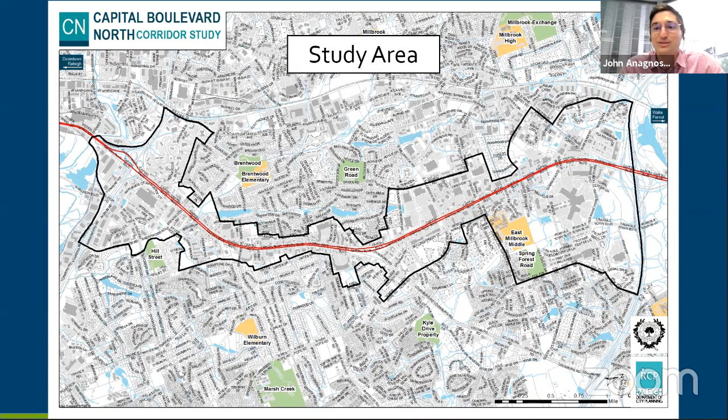This corridor study deals with a portion of Capital Boulevard between I-440 and I-540, and is mostly focused on the commercial areas along Capital Boulevard. Now, the proposals we have today do involve some of the neighborhoods, because we also know that neighborhoods like to have good bicycle and pedestrian connections as well.

The previous phases of this study talked about how to improve Capital Boulevard itself for all modes of transportation: vehicles, bus, bicycle, and walking. And then we also have some land use policies, and we are now towards the end of the study where we're talking about bicycle and pedestrian improvements and policies for community and economic development.

This study is initiated by the City of Raleigh and led by the City of Raleigh, and began in 2018. Now we're again moving towards the end of the study, and after this phase, we'll be preparing the final study report to be presented to the Raleigh City Council at the beginning of 2021, so probably January of 2021, for them to review and adopt.

So let's start out with a little bit of background about the previous phases of the corridor study. If you didn't participate in those phases, or it's just been a while since we've had any public outreach for this, this will help jog everyone's memory.

So the first phase of the study, we looked at how to improve Capital Boulevard itself, and looking a lot at traffic congestion and the growth in traffic that we are expecting in the future.

And so the way that we'd like to approach that issue is by converting Capital Boulevard to what's called a multi-way boulevard. What that means is there's different types of lanes in the street for different travel patterns.

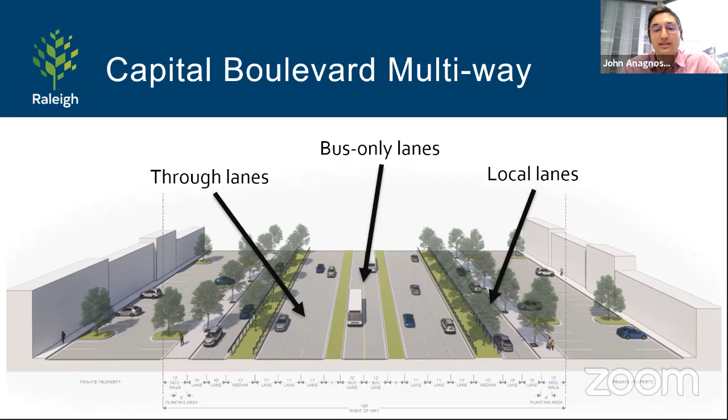The way those inner lanes are able to avoid traffic signals is that we would need to convert almost all of the intersections along this part of Capital Boulevard to interchanges. That means a cross street like Millbrook or Buffalo Road would pass over or under Capital Boulevard, allowing those inner lanes to avoid that cross street.

And then the outer local lanes would meet with the local street and would be able to use a traffic signal to make turns and access all the local destinations that they would like to access.

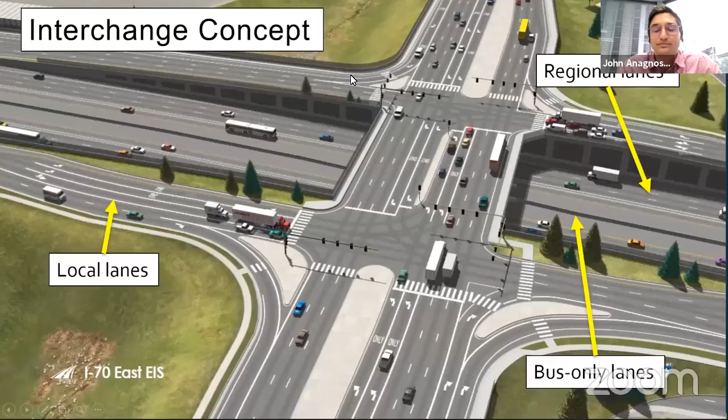So after we developed the idea for the multi-way boulevard and the interchanges for Capital Boulevard, we looked at some of the areas along the corridor where development in the future could be denser, or there could be opportunities for redevelopment. Those three areas are Triangle Town Center at the north end, Mini City in the center part of the corridor - the Mini City Shopping Center and the Capital Crossing Shopping Center between Millbrook Road and Calvary Drive - and then at the south end, the area where Highwoods Boulevard and Westinghouse Boulevard meet Capital Boulevard.

Those three areas have specific recommendations in this corridor study for how tall buildings should be and what types of development would be appropriate in those areas.

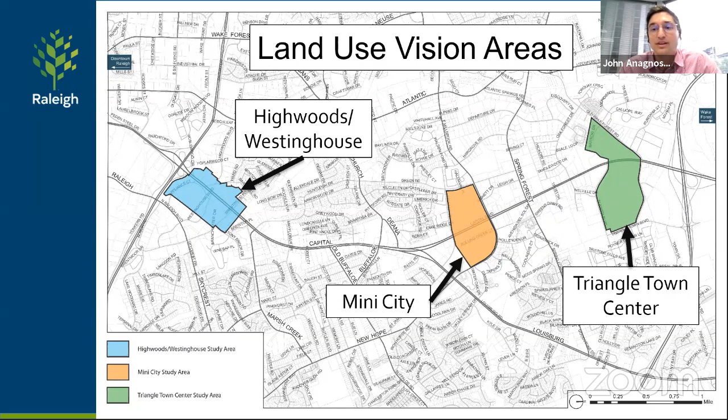So we've completed those phases, and we've gotten a lot of good community feedback about those ideas. Now we're ready for the next part, which is how do we make sure that aside from Capital Boulevard itself, there are good ways for people to travel around by bicycle and by walking, and how do we make sure that the vibrant economic environment we have on Capital Boulevard is sustainable and continues to provide services and goods to the community.

But before we get into the bicycle and pedestrian improvement ideas, we do need to think about what we mean when we say bicycle and pedestrian improvements or facilities. What are we talking about? In Raleigh, we have a set of tools that we use for helping cyclists and walkers have a safe and comfortable way of getting around.

Of course, sidewalks - all of our public streets are required to have sidewalks on both sides - and then intersections have painted crosswalks. In some cases, we can recommend pedestrian bridges to allow walkers and cyclists to cross large thoroughfares or highways when that is a better solution than crossing the street at the same level as vehicle traffic.

And then bicycle lanes, which can be buffered by painted stripes or raised concrete buffers, or bicycle lanes that aren't buffered and are directly adjacent to the vehicle lane. And just to note, in the future the city of Raleigh is moving towards a protected bicycle lane as the primary way that we install bicycle lanes.

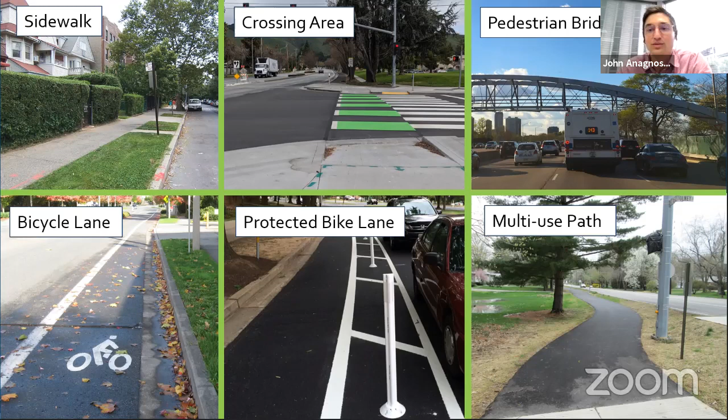And then finally, multi-use paths. A multi-use path is a wider asphalt path that goes along the roadway and can be used by cyclists or walkers, and is also sometimes called a shared use path or a side path, and can also join with a greenway trail - greenway trails also usually have a similar design.

So when we're thinking about what bicycle and pedestrian improvements would be really helpful for the area around Capital Boulevard, how do we make those decisions? How do we come up with those ideas? We, of course, want to look at background data and do some analysis.

So here are the inputs we looked at to come up with these ideas. The first thing we look at is the city's bicycle plan, called the BikeRaleigh Plan. This is an existing plan adopted by the City Council and part of our comprehensive plan. It shows the streets where there should be good bicycle facilities, and how they connect together to form a network allowing people to cycle all around the city of Raleigh. You can see on the map that there are different types of bicycle facilities recommended depending on the type of street.

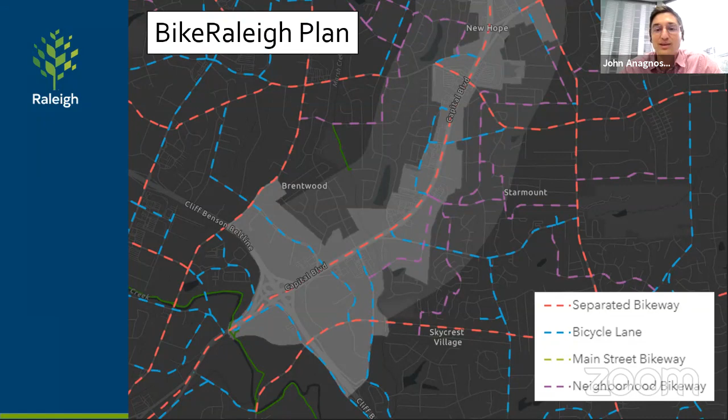So we are continuing that framework, and for each street we are recommending a particular type of facility. We also look at where there are sidewalks currently. When making recommendations, we want to think about how we're closing those gaps in the sidewalk network. The more connected the sidewalk network, the better and more comfortable it can be for someone walking.

Next, we had an analysis of the level of traffic stress. What that means is, if you're walking or cycling on a street, is it comfortable? Does it feel safe, and for whom? Is it comfortable only for someone who is really good at riding a bicycle or has a lot of experience, or is it comfortable for everyone?

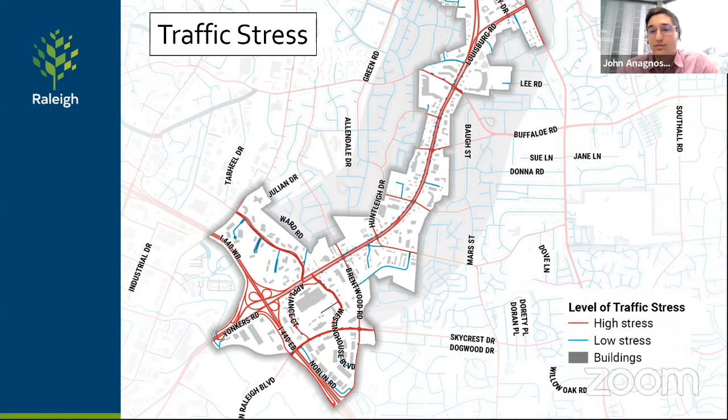The way we think about that is, are there sidewalks? Are there bicycle lanes? How fast are the vehicles traveling on the roadway? How close are the vehicles to where someone might be walking or cycling? Based on that, we can look and see what the level of traffic stress is, and that helps us think about what type of facility and where we can close some gaps.

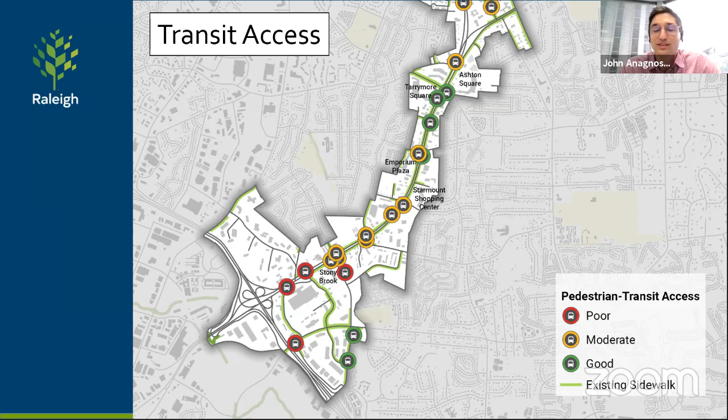We also look at where the transit stops are. This area of Capital Boulevard is served by the Go Raleigh Route 1, which is the most used Go Raleigh route in the system, and also 3 crosstown connectors that pass through this area to connect to other destinations to the east and west. So we know bus service is very important, and when people are walking or cycling, in a lot of cases they'll be going to or from a bus stop, so we want to make sure those connections are really good as well.

So when we put all those things together, we come up with a map of the greatest priorities for future bicycle and pedestrian connections, and that looks something like this. This is useful—it helps us think about where we want to start first—but we have to take this a step further and think, well, how do we actually provide these facilities? What is actually going to lead to them being constructed?

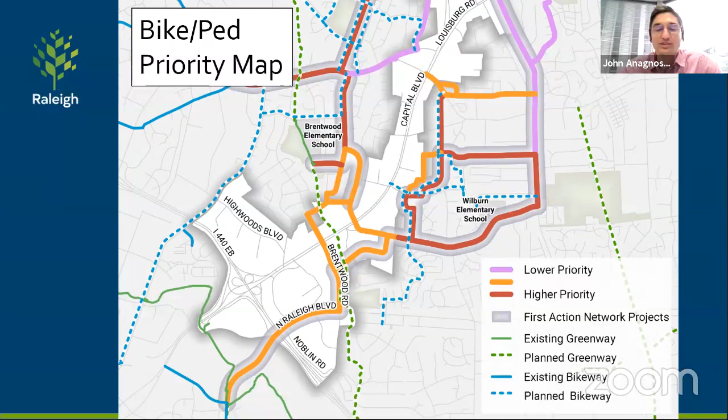The answer to that question is threefold. There are 3 basic ways bicycle and pedestrian improvements can be made in the city of Raleigh. The first is city-initiated street improvement projects. The city is, on a regular basis, looking at streets that need to be widened, need sidewalks improved or added, need street trees planted, things of that nature. So we have basically a rolling schedule of city street improvement projects.

We know there are several of these already underway around Capital Boulevard, and we want to think about what we can add to that set of projects in the next 5 to 10 years to again fill in those gaps. That is the most predictable way for us to implement these ideas. The city has pretty much total control of those projects, and really the main factor of whether they get done is whether we have enough funding and how much time it takes, because we do have limited staff resources for that.

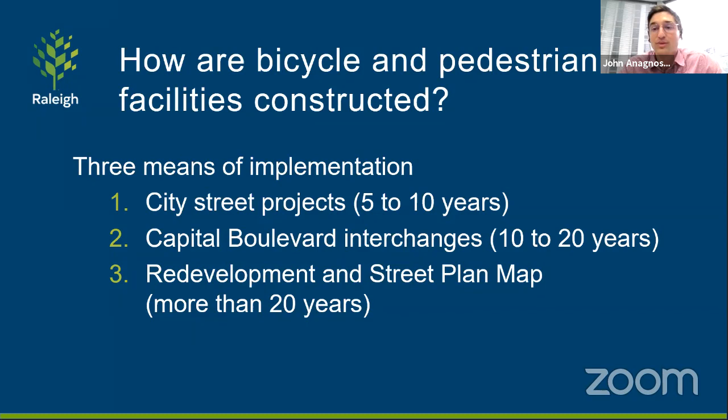The second way we can look at bicycle and pedestrian improvements is the Capital Boulevard street improvements themselves, and the third way is redevelopment of private property. We'll get into those in just a moment.

Going back to the city street projects, there are 7 street projects already underway in the area around Capital Boulevard North. Atlantic Avenue is in the design phase of a project that will add a consistent sidewalk on one side and a multi-use path on the other. Fox Road is in the construction phase of a project that's going to add consistent sidewalks and bicycle lanes.

Green Road is nearing completion of a sidewalk improvement project. Highwoods Boulevard is in the very beginning of a sidewalk project. New Hope Church Road is in the construction phase of a project that will add bicycle lanes and consistent sidewalks from Capital Boulevard to Green Road. Old Wake Forest Road is at the very beginning of a widening project that will add consistent sidewalks on one side and a multi-use path on the other.

And then Trawick Road and Marsh Creek Road is in the design phase of a project that will add consistent sidewalks on one side and a multi-use path on the other. So those are a lot of great projects that will add good bicycle and pedestrian access and connectivity for this area.

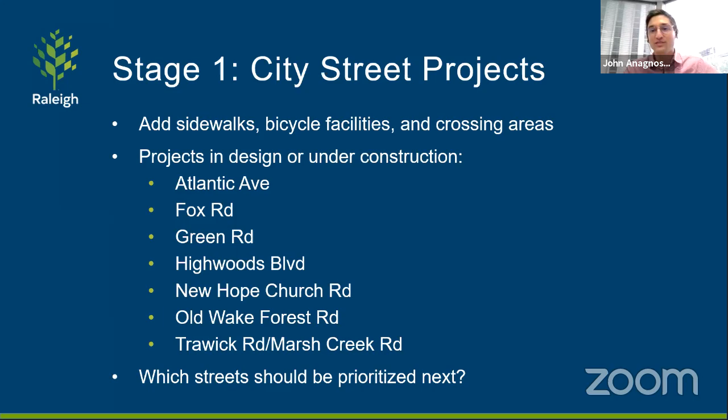So once we think about those projects, 5 to 10 years down the road, what's next? The yellow lines on this map show generally our system of priority facilities for that 5 to 10 year time frame. Here's the north end, north of the split with Louisburg Road, and here's the south end. Again, the yellow lines represent where we think city street projects should be adding these facilities.

The two things I want to point out about this network, the yellow lines you see in this map: number one, this network is providing ways to move north and south along Capital Boulevard without actually walking or cycling on Capital Boulevard itself. On the southern end, you can see 3 different routes, one through the Brentwood neighborhood, one through the Starmount neighborhood, and one along New Hope Road.

And in the north end, basically continuing those up along New Hope Road and along Green Road. In addition to the north and south travel we want to facilitate, there's also east and west travel that we want to make sure is safe and comfortable for traveling to destinations across Capital Boulevard. So we're trying to provide multiple options for both of those ways of traveling.

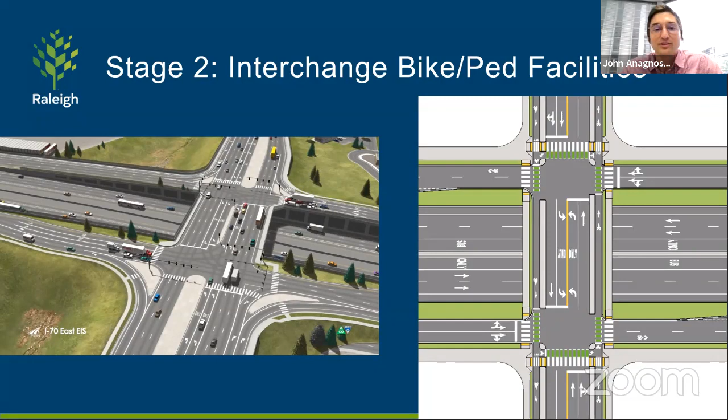So this is a design concept we have for the interchange. We have designs for different sizes of cross streets that'll have interchanges. A street like Spring Forest is a very large cross street and will need a design more like this. Smaller streets like Trawick and Huntley can have a different design more fitting for a smaller local street.

The reason we made these design concepts is that the Capital Boulevard multi-way project will have to go to the North Carolina Department of Transportation. We will need funding assistance from them. Capital Boulevard is also a highway, US Highway 1 and US Highway 401 at its south end. The way NCDOT highway projects work is if the local government where that highway project is taking place has an adopted plan that recommends bicycle and pedestrian facilities, they will include those facilities in their project. By putting these ideas into this plan, we are setting ourselves up so that if and when the street project is accepted by NCDOT, we can have them install these as part of their project.

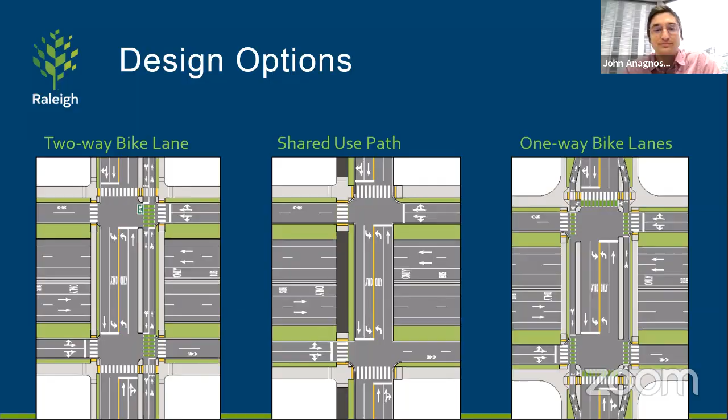Here are some example images of what that can look like. As you're approaching those interchanges, the bicycle lane will be buffered and protected from the vehicle lane by either a striped buffer area or a raised concrete buffer area, improving the level of comfort and protection from the vehicle lane.

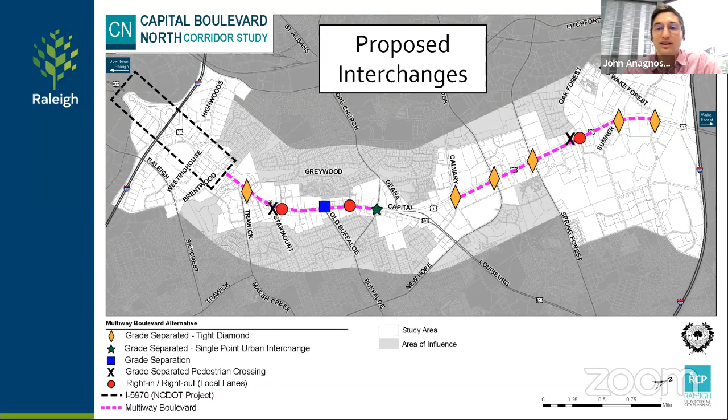In some areas, like I mentioned at the beginning of the presentation, we are not recommending a full interchange with a bridge like those design concepts I just showed you. Those two locations are Starmount Drive and Oak Forest Drive. The reason is that at those two locations, the level of east and west vehicle traffic is not very large. The west side of Starmount is Mayflower Drive, which is a dead end on the west side of Capital Boulevard. Oak Forest Drive on the east side is currently also a dead end, though it is proposed to connect through to Sumner Boulevard in the future. But we are not expecting much east and westbound vehicle traffic on those streets, so the value of a full interchange is not really worth it compared to the benefit to the north and south travel for Capital Boulevard in those two locations.

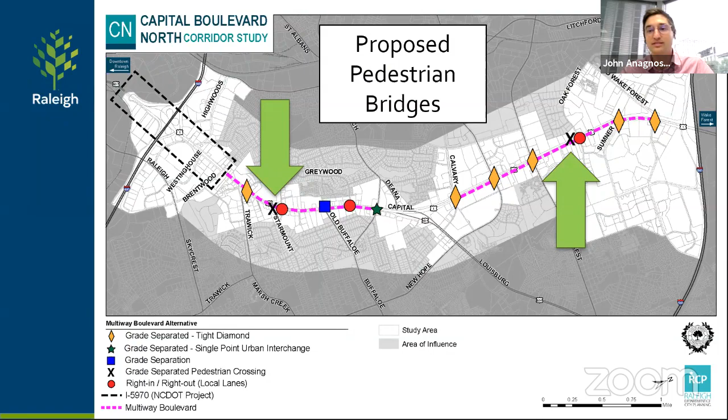So for Starmount and Oak Forest, without the interchange to give us a comfortable way for pedestrians and cyclists to cross Capital Boulevard, we are recommending pedestrian bridges. These can look something like this - these two images are examples of what those pedestrian bridges could look like. They are required by law to be ADA accessible, so they must have ramps so that people who use a wheelchair can make use of them, and they will be connected to our local sidewalk network. That is our proposed solution for those two locations.

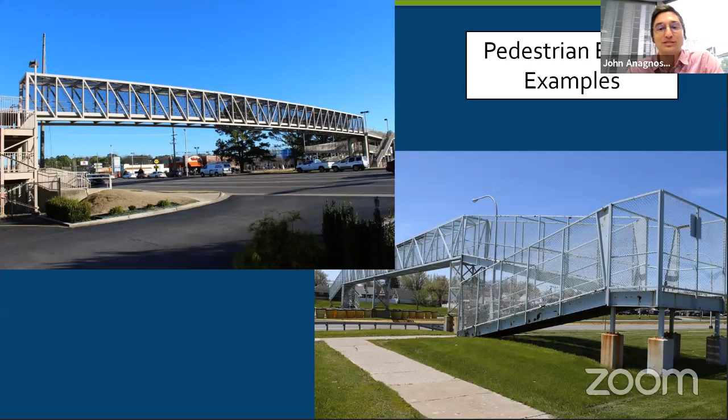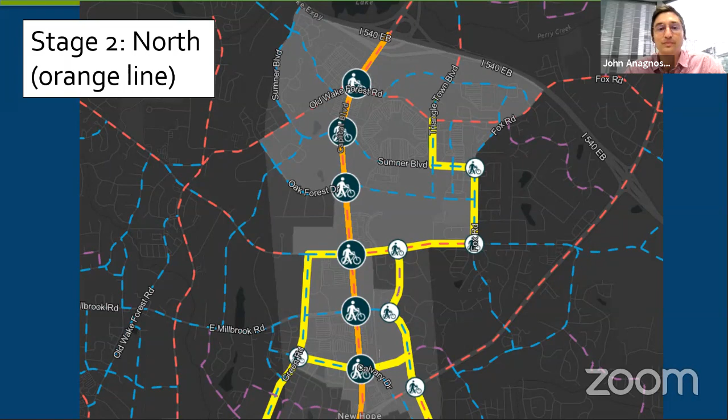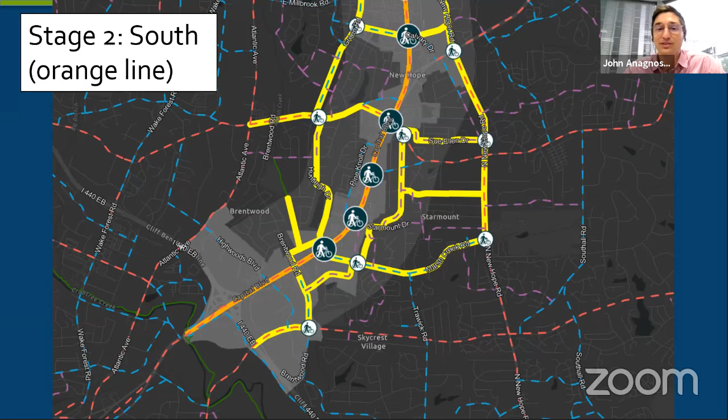That brings us to the third stage of how these improvements can be implemented, and this is the least predictable stage. The street improvements for Capital Boulevard and the interchange projects, we think those can be done in a 10 to 20 year time frame. So in terms of time, we have the city projects in a 5 to 10 year time frame, the Capital Boulevard multi-way project in a 10 to 20 year time frame. Finally, with private development, we don't know if and when private property owners will want to redevelop their property, so we can't really attach a time frame to this - this is our longest term set of proposals.

What we're proposing for private property along Capital Boulevard relates to what's called a street plan map in the city of Raleigh. The street plan map is an adopted policy map that's part of our comprehensive plan, adopted by the city council, and any changes to it must also be adopted by the city council. It says where there is an existing street, whether that street needs to be widened to have more lanes, and what type of streetscape it should have.

So how wide should the sidewalks be? What type of tree planting or grass lawn should there be? Things like that. And if it should have bicycle lanes.

And so the other thing that the street plan does, it says where there's not an existing street, where a new street should go.

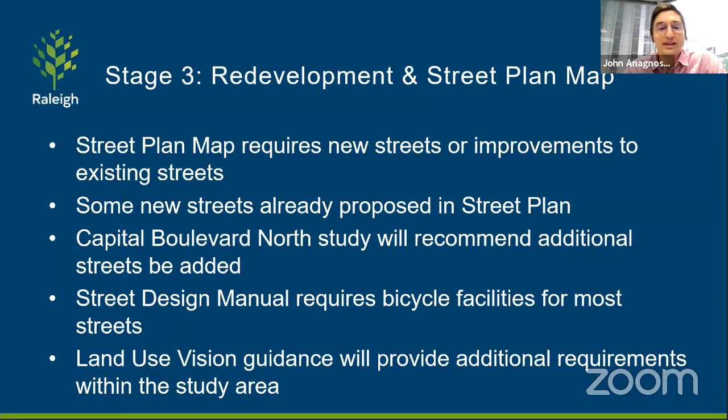The dotted lines are streets that don't exist today, but the city is proposing to exist in the future. The solid lines are streets that already exist. And what's notable about the area around Capital Boulevard is that there is only one dotted line, only one new street that's proposed on the existing street plan map.

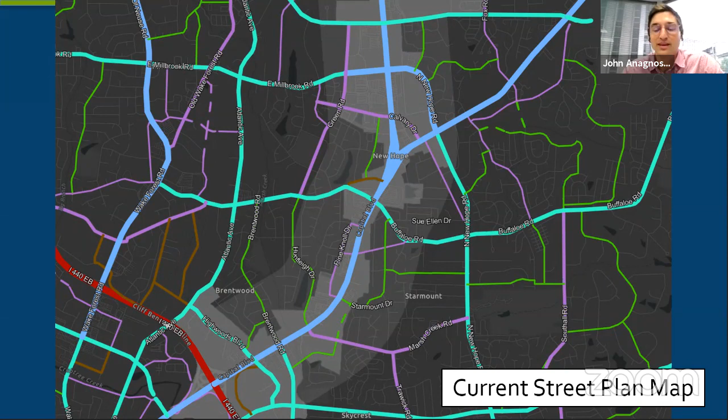What we are proposing is to add more streets. And the reason for that is, number one, we want to provide alternatives to driving, walking, or cycling on Capital Boulevard itself. So from a traffic congestion standpoint, if people are able to access these local destinations without actually getting onto Capital Boulevard, that can relieve some of the congestion on Capital Boulevard.

The other thing is, earlier in the presentation, I mentioned that we have the land use policy recommendations for those 3 areas along Capital Boulevard: Triangle Town Center, Mini City, and the Highwoods and Westinghouse area. In those areas, we are envisioning that there can be denser and more mixed-use development in the future.

That denser development needs to have sufficient streets to serve it, to allow people to get to the residential uses, the businesses, the workplaces that are in there. We need to make sure that there's plenty of street capacity to serve that denser development.

And then the other aspect of this is that these new streets that we're recommending will also be smaller streets than Capital Boulevard, and so may be more comfortable for people walking and cycling. And so that creates another alternative to walking and cycling on Capital Boulevard.

It also makes smaller blocks. So if you're walking or cycling and you have to go around a very large block to get to your destination, that takes a lot of time, and it may deter you from actually going to that destination. By making the blocks smaller, it's easier to get to the other side of the block. There's more options for getting to that destination.

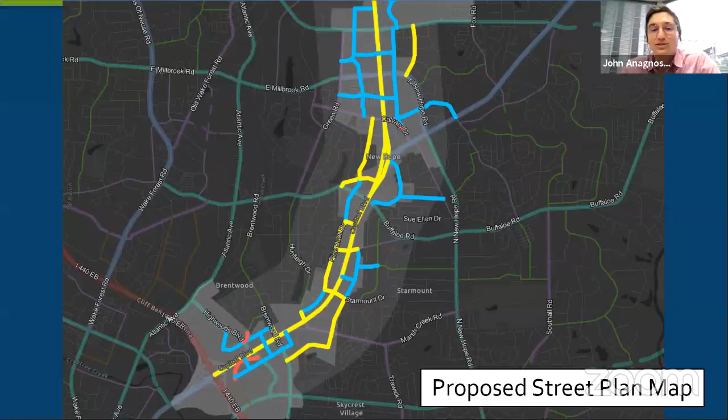What most of these new streets that we're recommending, the way that they would be constructed is if these shopping centers or commercial areas were to redevelop in the future, part of that redevelopment would be that it's required to construct these public streets. So this is not saying the city is going to force anyone to go in and push a street through an existing development. So here's what those streets would look like.

In the south end of the corridor, south of Louisburg Road, we're generally recommending the Main Street type. The Main Street type is a good street type for walkable commercial areas, which is what we're envisioning for the future, more mixed use and slightly more density. This is really facilitating that more urban style of walkable, comfortable pedestrian area that we don't see a lot of on Capital Boulevard today.

In the north end, north of Louisburg Road, the new streets that we're proposing are mostly recommended to be this 2-lane avenue. This is more for a little bit more of a suburban context, and that is what we see in the north end. But it does have consistent sidewalks and a bicycle lane. In the southern part where we're recommending the Main Street, it's a wide sidewalk and parallel parking.

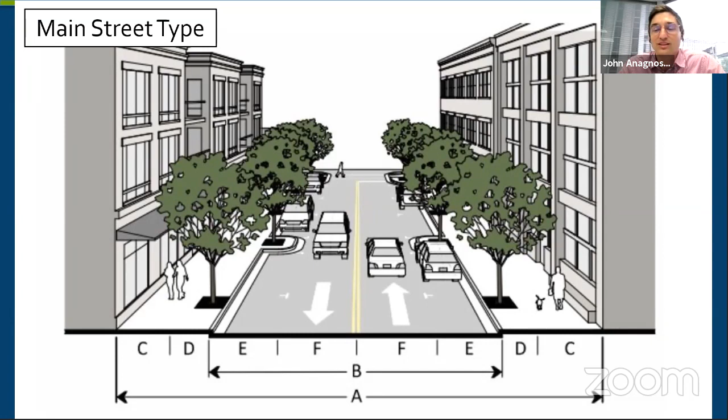The other key thing about these recommended streets is that these are pretty much the smallest streets that we have available in the city's street design manual. The street designs that the city regularly uses and are required for new development, these are the narrowest ones that we have for this type of development. So we are not trying to make this a burden. We're trying to make this a public benefit that serves the general public and these businesses and residences.

Just to give you an example: in a lot of shopping centers along Capital Boulevard, there are private driveways that pass through, but they're not public streets. So they don't have consistent sidewalks or striped crosswalks, ways to get from the building to Capital Boulevard or the nearest street.

Let's look at an example: the Capital Crossing Shopping Center across from the Mini City Shopping Center, between Millbrook Road and Calvary Drive. Capital Crossing already has private streets crossing it in both directions, north-south and east-west. What we're saying is that in the future, if this shopping center redevelops, if an owner wants to rebuild it as an office building or mixed-use development, they would be required to convert this private street into a public street, which requires consistent sidewalks and in some cases a bicycle lane.

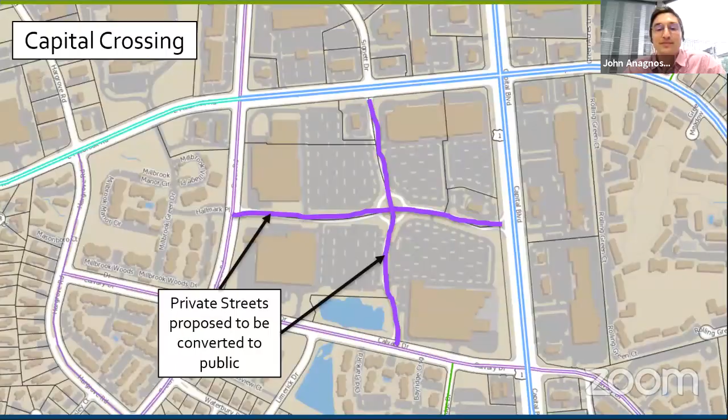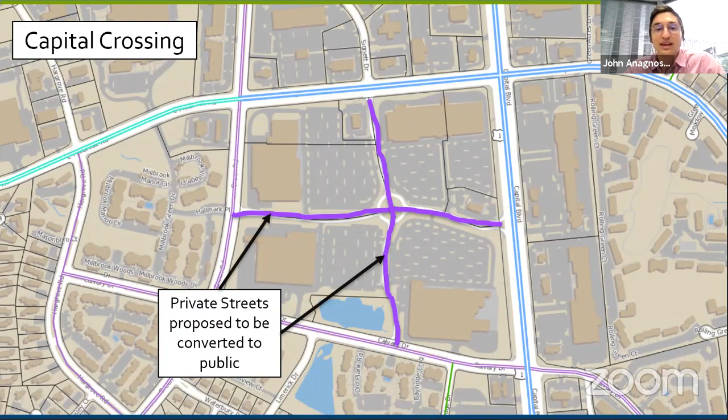Millbrook, along with the interchange proposals for the Capital Boulevard multiway, can have bicycle lanes, and the new public street through the Capital Crossing Shopping Center can have wide sidewalks, making it a more comfortable experience for people walking. The key goal here is balancing the benefit. Currently, private driveways and shopping centers are focused on cars and parking. What we want is for everyone to have an equally safe and comfortable trip, whether in a car, walking, or on a bicycle.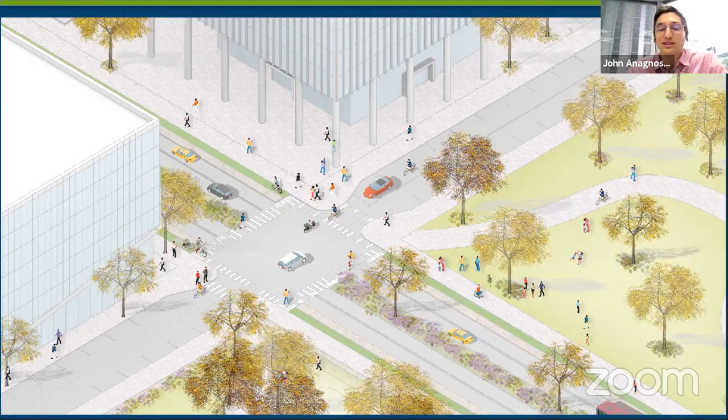That concludes the bicycle and pedestrian portion of the presentation. There are more specific details about those recommendations in the materials attached to this meeting. If you go to the survey for this meeting, you can see more detailed maps, and those maps are also available on the event webpage.

Let's move on to policy recommendations for small businesses. Economic and community development in planning processes like this tends to be more in the form of text recommendations rather than map-based. So we have a policy document with draft policies and actions covering all phases of the corridor study, including recommendations for supporting small and local businesses.

There are three basic ways we want to approach that idea. The first is that we have a number of small and local businesses today on Capitol Boulevard. To give you a sense of that, the area around Capitol Boulevard North has more than 20% of all the retail space in Raleigh and is home to over 200 small and local businesses. So we know small business is a big part of Capitol Boulevard.

We want to look at how we can support small businesses who want to stay in existing shopping centers, where owners want to keep operating them. One way is through two grant programs at the City of Raleigh, one for the exterior of businesses and one for the interior. We want to make sure businesses on Capitol Boulevard are aware they can seek those funds and request grants from the city. So we want policies recommending educating and informing business owners, and adjusting the scoring of those grants to ensure they're fairly awarded, not biased, and supportive of businesses in shopping centers like those on Capitol Boulevard.

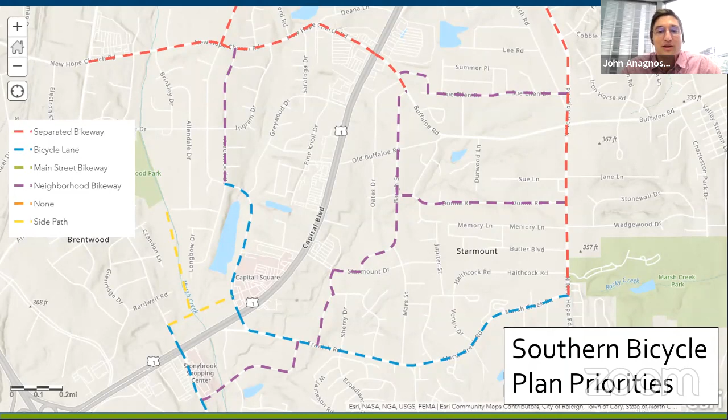So this is the map that you saw before, the yellow and orange lines, but this is a little bit more detailed, closer up. This is basically the network. This is the south end, we have a central portion and a north end. So we can start by looking at Starmount.

From an east and west perspective, the first priority area is Trawick and Marsh Creek. As I mentioned, that is already in the design phase of a project that will add a multi-use path. So that's a great first step. Then north of that, Donna Road can connect from Bog over to New Hope. And then Sue Ellen, north of Buffalo Road, also an east-west connection. I'll walk through each of those.

Then for the north and south, starting out with Edgetone. This is close to Stony Brook. So here's Edgetone. This offers a pretty direct route north and south between Trawick and Starmount, but it's also pretty close to Capitol Boulevard. So if people want to go north and south but still access destinations on Capitol, Edgetone is a good choice. And here's what Edgetone looks like today.

And then from there, we go up to Bog. So there would be a little bit of a jog down Starmount to get from Edgetone to Bog. And here's what Bog looks like today.

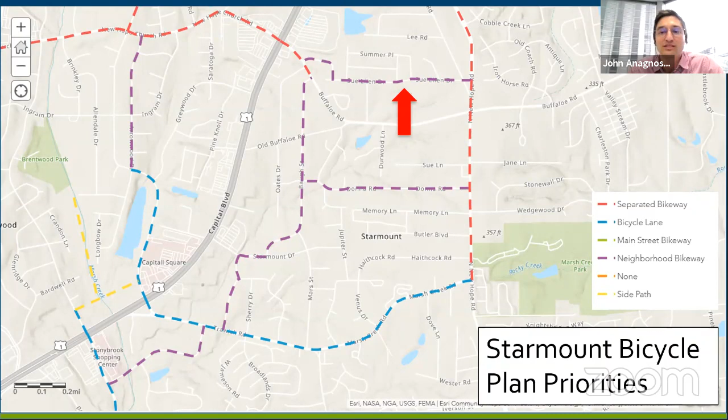Here's Sue Ellen today. You'll note that the streets we're choosing are currently pretty wide and don't usually have a lot of street-side parking, and that's the kind of thing we're thinking about - where is there going to be that comfort level for cycling.

So let's look at the Brentwood side now. Starting from the north, we know that New Hope Church is going to get bicycle lanes and sidewalks, and Green Road just got its sidewalk improvement project. Starting from there, we want to look at Arrowwood Drive as the way to get south through Brentwood.

Here's Arrowwood. You can see here that it eventually connects with Huntley, so you might wonder, why not start with Huntley? This image gives a little bit of a sense of why not select Huntley.

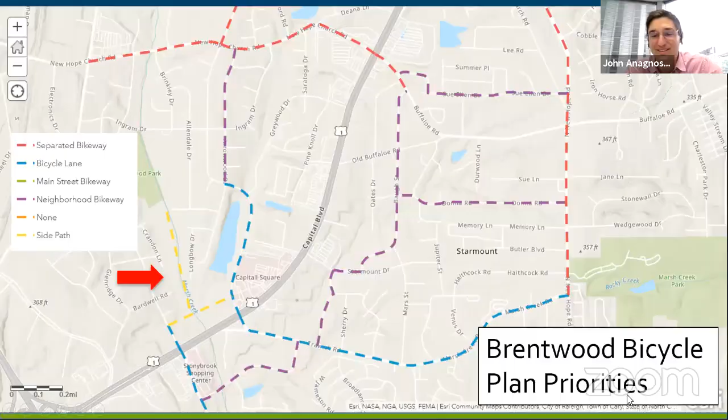And then there is a question of what is the best connection. Should that connection be made through Longbow to Arrowwood, or should it go directly to Huntley? That's something we are not working out in detail in this corridor study because there are too many factors that are not set yet to make those decisions.

Again, that is very early in the planning stages. But if there is an interchange at Highwoods and Westinghouse, that would also provide a connection east and west in this area. As I mentioned in the other presentation, Highwoods is also getting a sidewalk project that will connect all the way over to Atlantic Avenue, which we know is getting a multi-use path. So the more connections we have, the more options there are for cycling and walking.

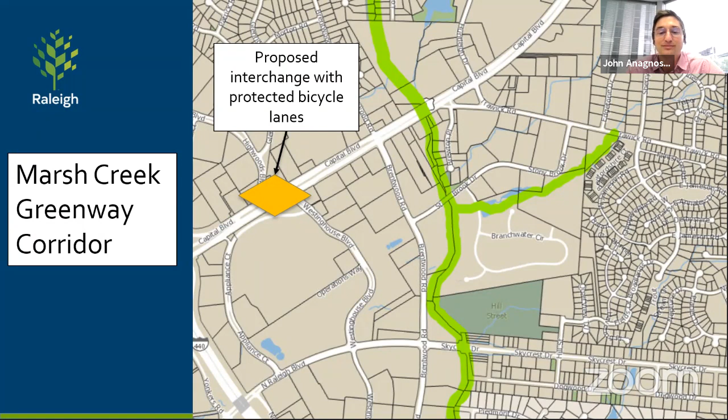So that's a really good connection for people to be able to get from Brentwood or other parts of the Capitol Boulevard corridor over here to Hill Street Park. Here you can see what that looks like in our proposal map.

All right, so that concludes the specific presentation for Starmount and Brentwood. I hope that's added a little bit more information if you're curious what specifically could happen there.